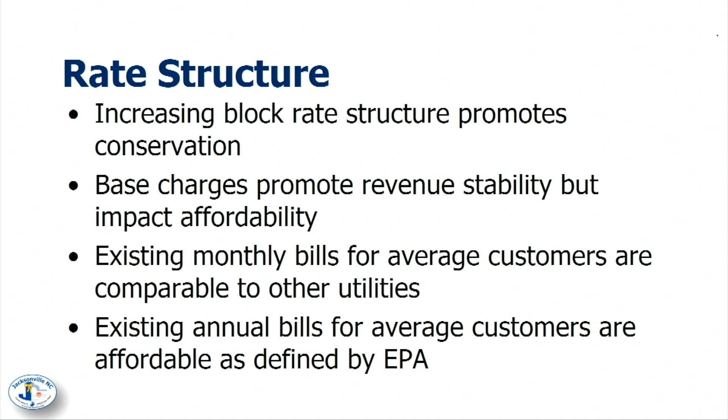And then our existing annual bills for average customers are affordable as defined by the EPA. So the EPA gives us a guideline and says that the annual water bill should be less than 4.5% of the median household income. And for our average bill, based on 2021 salaries, we are about 2%. So we're doing really well there as far as being affordable, according to those guidelines.

And when you talk about the minimum usage, the base, that customer that does use the 2,000 gallons or less, we're at 1% there. So there is a difference between a person using 4,000 or 5,000 gallons versus the person only using 600 gallons.

Yes. Significant. Okay, again, we wanted to make sure that clarified, because obviously you got some folks - that's what led to this question. You've got these folks that use an extreme amount of water, and then you got a regular person that just uses minimal. So explaining what you're doing as far as the cost rates is very important.

Yes, and actually we're gonna get to a slide that goes over the actual fee schedule. Thank you.

So just, again, the rate model and how that works - we put in the operation and maintenance, all of our revenues, our budget, our CIP. It looks at our fund balance that we start with, and then the rate increase, it calculates - we do the just-in-time rate increases where it shows what it would be if you had a rate increase only exactly when you needed it.

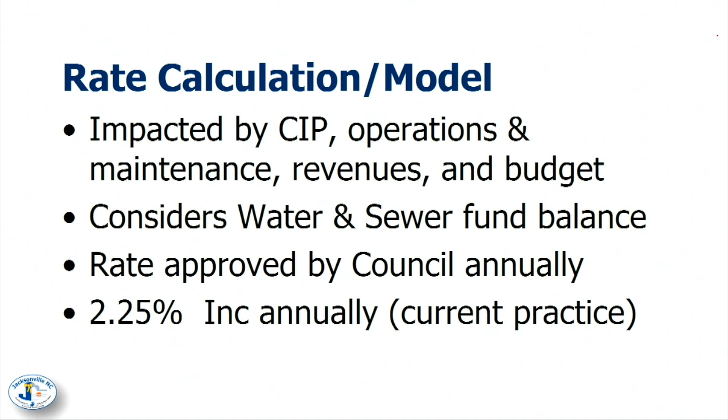And all of that work leads us to our rate schedule, or fee schedule. The very top line, the 5/8 inch meter, is the size that most of our residential properties have. We do have a fair amount of customers with a 3/4 inch meter, so their rate is a little bit higher. But you'll see the fixed rate is the 55.95 total, broken down into water and sewer.

We do have some customers that are only water and some that are only sewer. The first 2,000 gallons of usage is included in that base rate. So 2,000 gallons and less, it's always going to be the 55.95 if you have a 5/8 inch meter.

As you begin to use more, you start to incur additional costs. It's 85 cents per 100 gallons if you stay between 2,000 and 6,000. Most of our residential customers average 6,000, so that's a large percentage of our customers. We also have some customers in the 6,000 to 10,000 gallon range, and that's going to increase your bill a bit more, with a higher rate for that usage. And of course, not many residential customers, but a lot of commercial customers and multi-unit properties get into those higher tiers.

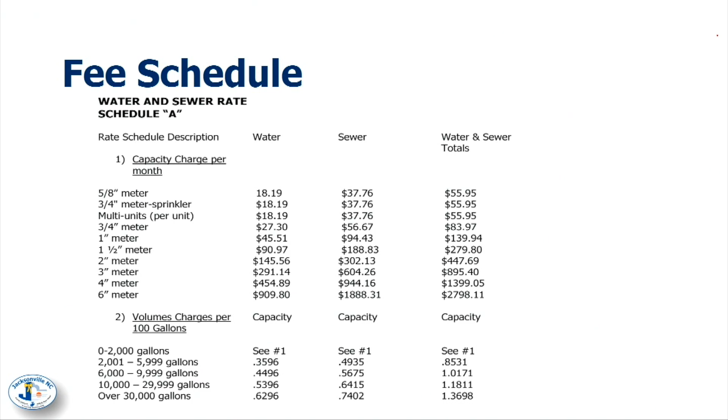So before you leave that, I think everybody's used to buying in bulk, right? If you buy in bulk, you get a cheaper rate. This is the exact opposite of that—the more you use, the more you pay. So when you get into that volume above the 2,000, you actually pay more as you use more.

Question, just out of curiosity, does meter size impact the 2,000 gallons? Is a 6-inch meter still minimum 2,000? It's all the same—the base rate for every meter, no matter the size, is 2,000 gallons. Obviously a 6-inch meter is going to use up that 2,000 gallons a lot faster than a 5/8 meter. But I think we've only got 1 or 2 6-inch meters, like the hospital, so they're never going to be within their 2,000 gallons.

Not to complicate things too much, but when we talk about larger meters, if you have an apartment complex with a larger meter but it's multi-unit, their billing is a little different. They get the 5/8 inch rate per unit. So if you have an apartment complex with, say, a 24-unit building that has a 2-inch meter, they wouldn't be billed at the 2-inch rate—they'd be billed as 24 5/8 inch meters.

So I just wanted to do a comparison between the city rates and ONWASA rates. This comes up quite a bit.

As you can see, the top line is the city's rate. We have the water base and the sewer base there. We include our 2,000 gallons of usage in that $55.95 that you pay each month. ONWASA, their base rate is only $45.36 a month. However, there's no usage at all included in that.

If you were to use 1,000 gallons of usage, the bill goes to $57.32, so it is a little bit higher than our base rate, even with half of the usage. And if you were to increase that to 2,000 to match ours, their bill goes to $65.29. So it's about $10 more for the same amount of usage.

So while we put this up as a comparison, we have to remember that ONWASA has a completely separate system than the city. In many cases this includes water and sewer, so that might be comparable in, say, Richlands or Swansboro, but much of the county doesn't actually have sewer. And some, like the neighborhood that Derek lives in, has private sewer, so they would pay an ONWASA water rate but a private sewer rate. So we put this up as a comparison just so you could see, because they are adjacent to us.

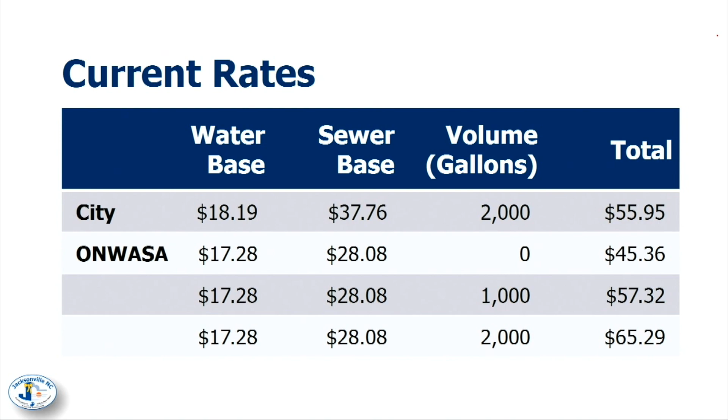And they have a different rate structure than we do. Many municipalities around have actually gone to zero gallons included in your base rate. There's only a few left, and we're one of those that includes any gallons in the base rate. But it's worked well for us. We feel that it helps keep our bill reasonable.

To operate a system, anybody that's run a business knows you have fixed costs whether you have a customer coming in or not. So we have to cover those fixed costs - debt service payments, loan payments that we have to make, breaks and repairs, parts, personnel, and equipment. So we have things that we have to cover no matter the usage. But then we have things like treatment, chemicals, pumping, electricity - the more that we use, the more it costs us. So those are our variable rates.

Also, not to complicate things, but if a resident has a 3/4 inch meter and they would like to go to a 5/8, we will allow them to do that. I think it's a swap-out fee. While we will, based on the American Water Works Association standards, tell somebody what the recommended meter size is based on industry standard, we'll allow them to have a different meter size if they request it. So if somebody has a 3/4 inch meter and wants a cheaper base rate, we'll allow them to swap it out to a 5/8.

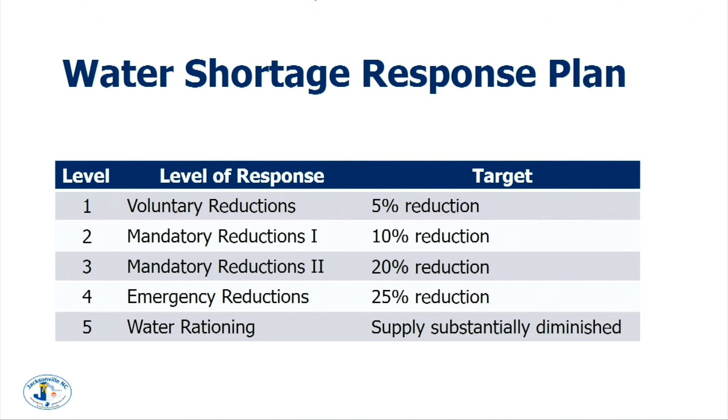Amy, is there anything you want to add to this slide? No, just the note that what it does is put a requirement in place before you can go into this — there's no individual who can just declare the ability to step into this. With each step, something happens and then you have to do this, which helps. The next screen really identifies it better, I think.

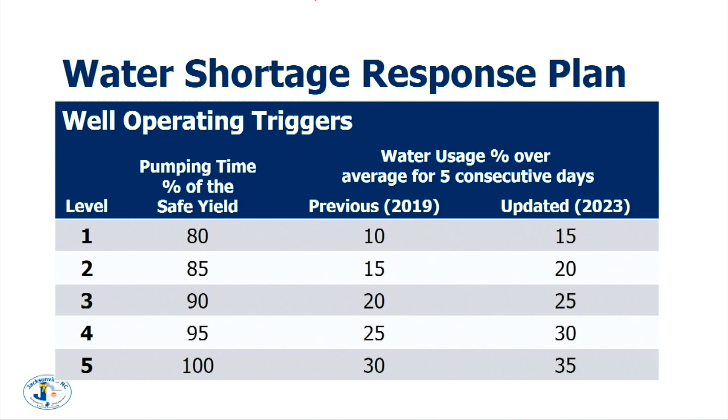While it's not much for level 1 or level 2, Amy, if you'll flip to the next slide - look at the different levels. As you get into the different levels, there's actually violations and monetary penalties associated, and if you get caught doing it more than once, we'll actually cut your service off. This happened in other parts of the country during water restrictions.

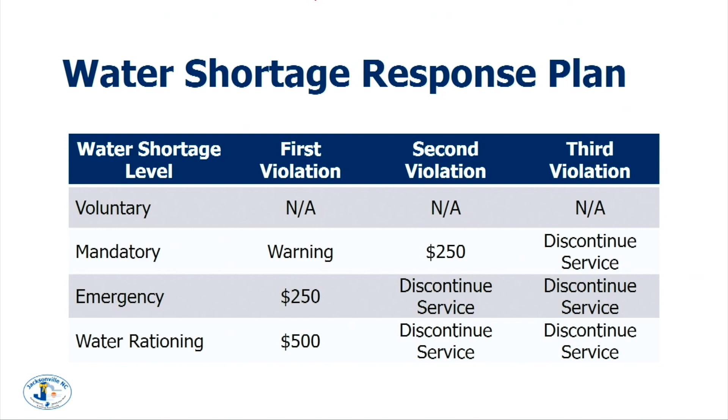I understand what you're saying, where it doesn't really account for population growth or anything like that. I think this is more for an immediate situation, and it doesn't address future planning. It seemed like, how do you anticipate future requirements for water if you're not calculating it here as well - that's where I'm getting confused. Based on what I heard you say, you're not concerned with that because we have the capacity now to support, let's say, future 10 years or whatever, without adding new wells. Yes, that's where I was trying to lead to.

We do have that in place. Every year also with the state, you're required to submit your numbers for the local water supply plan, and that kind of goes hand in hand with this. But with that one, it looks at the next 50 years of population growth and estimates that out. And if in 30 years you're exceeding, say, 60% of what you have, that's when the state's kind of trying to get you to look for more options, look for other things. We're fortunate enough that we do have extra supply, so we don't hit that mark every time. But every year that does get looked at.

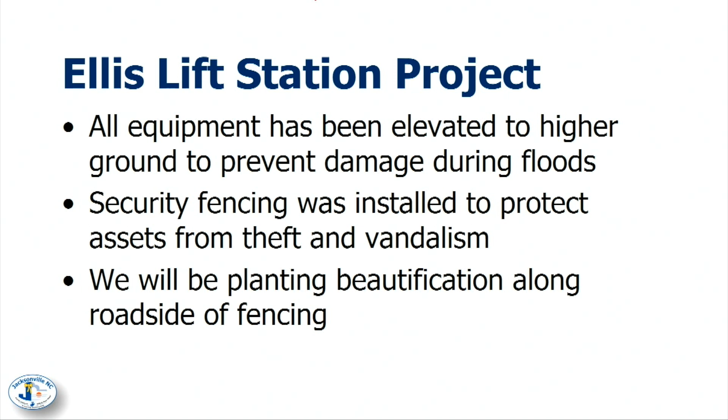There are a lot of little kids in the area who, when they see these big stations, think it looks like a playground. If I were a kid, I would be out there playing too. But they put up some pretty tall fencing over there, and our plan is to put up some beautification along the roadside so that it doesn't look like a fortress or a plant in a residential area. We're trying to bring up the enhancement of the lift station.

So the biofilter has been upsized to 25,600 CFM, which is considerably larger than our last one. The reason we had to upsize is because, like I said, we moved everything to higher ground, and that came with distance. Our last unit was closer to the building in the flood zone, so it didn't need to be as large. We had to compensate for the distance.

That came in at just shy of $85,000 for the biofilter. And for the generator, we upsized to a 200 kW generator, which is oversized for the pumps we currently have in the station. But we went with this size so that in the rare occurrence of needing all 3 pumps at one time, or them coming on across the line instantaneously rather than ramping up, we'd have enough voltage to pull all 3 pumps at once if need be.

That came in at $116,000—a very good investment, because our past units got submerged and damaged. We did everything we could every time it happened, but there was just so much wear and tear from the location it was originally designed for. For the bypass pump, we have a maximum of 8,800 GPM, but we have it set to 4,700 GPM so we don't overcome the force main it pumps to. If we turned it up higher than 4,700 GPM, we'd have problems downstream.

We would have to enlarge our force main as well as the gravity lines that our force mains feed into, so we have the ability of pumping more than 4,700 GPM. Hopefully we'll never have to, but if we do, at that time, or prior to that, we'll probably look into upsizing the force main.

And I think we're already in the process of considering extending the force main now, so that may help with us being able to turn up the bypass pumps if need be. And that came in at $103,000. Compared to our mobile units, it's considerably more costly, but these are stationary, and also at higher elevation, so we don't have to pull a pump to that area when we have a bad storm, or worry about putting them up on trailers to keep them out of the water. They're on permanent fixtures well away from the pump station.

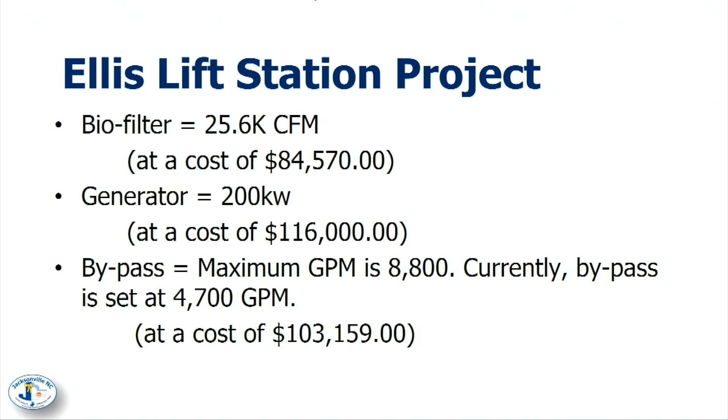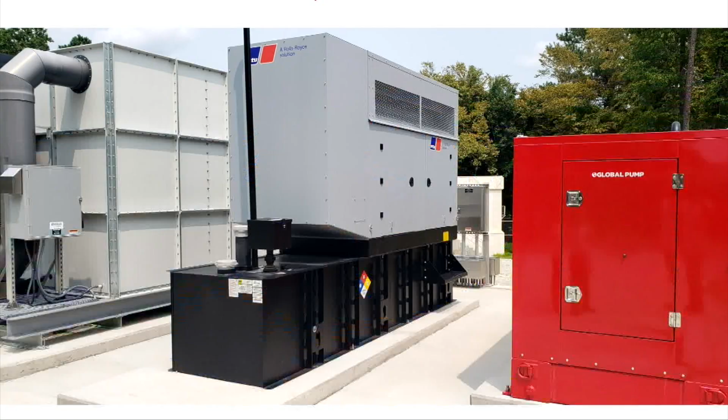How far is it from the station now? Go back, your pictures showed the station in the background. Isn't that the station behind it? Negative. Yes, sir, so you can see the station, the white part. Yeah, so you can see the building in the background there.

I would say with the elevation change, altogether, about 45 to 55 feet as to where we used to have those units right at the building. Because we would even run some of the plumbing for the bypass pumps as well as the conduits for the generators right into the building, right along the side of the building. So we were close. But like I said, this helps being that we're so far, and once we landed where we were gonna put them permanently, that slab is elevated.

So before you leave that, when we started looking at this project originally, I went back and looked at - I know you've seen me show that picture of Ellis pump station flooded up to midway of the door or so. When it flooded like that, I went back to the pictures, the elevation of the land, not including the pad, did not flood at that level. The water was just about level with the top of where the land elevation was at this point. There were trees - I don't know if you remember, but we ended up having to take out, unfortunately, a pretty good row of trees. But that area wasn't flooded during Florence. The water was up to it, but it wasn't completely flooded.

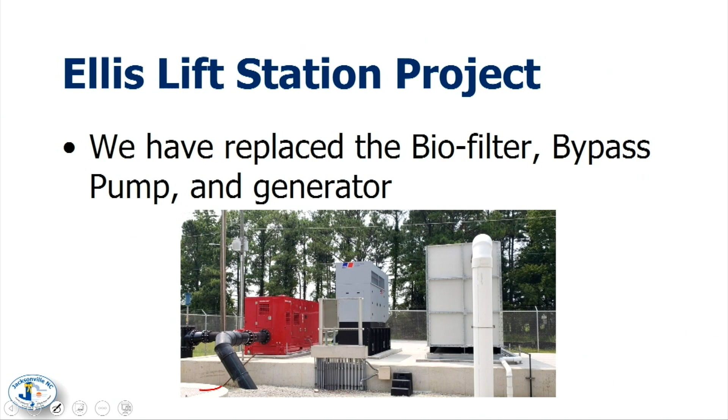I'm not sure if you can see it in this slide, it's at the bottom left corner. That is one of the wet wells that we had to install in conjunction with this project - this right here. So what happens is we've got float bulbs located in that wet well. Once the level gets so high, it'll trigger the bypass pump to run. And it takes about 30 seconds to a minute to prime up.

Now mind you, this is a large pipe as well as it's far, so it only takes about 30 seconds to a minute to prime up. And once it does, it'll hold that level or pump it down until the off bulb falls, and it'll just keep repeating cycles as need be. So where's it pumping to? To the force main - the same place that the station itself would pump it. The only difference is now the bypass pump, which is out away from the station, has taken over, doing the same job that those 3 pumps inside of the station were doing.

Pumping into the same force main that I was telling you about, that we're looking at possibly extending one day. So the philosophy behind this was to make the station more resilient.

When we have a predicted storm or something we'd expect flooding from, we can actually lock the station down. It's waterproof, we waterproof the station, and it can operate. The idea is you want the station operating normally as long as possible.

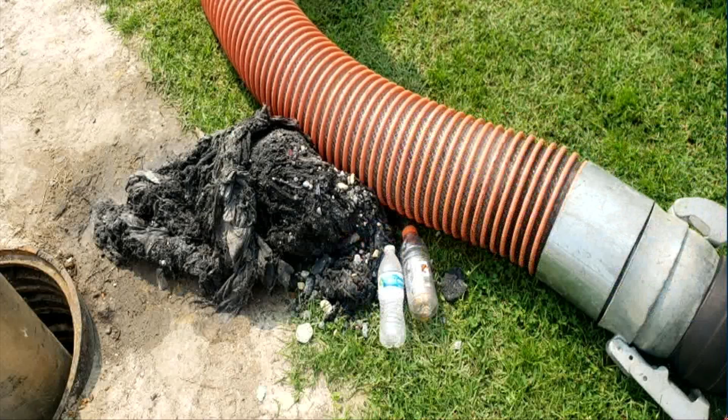Pressure point, yeah exactly. Average flow for this pipe - this actually comes from Ellis Lift Station. Ellis is what feeds this pipe. It averages 900,000 gallons a day.

And that's average, that's not in wet conditions usually. So here I had them place the bottles next to the debris just to show you in reference of size. You know, that's a lot of debris hanging down at any one joint.

Can you vent that? So the gases can escape? Or is that illegal or troublesome? We do have air releases, I know some systems have that.

But you know, in this case, it just boils down to over time - I think this was constructed in the 70s, so you have 70s construction. I think this station was built in 78, maybe. So you have 70s construction, concrete pipe, hydrogen sulfide gas, and there's so much flow through there that it's almost impossible to do anything, which is why you can see the bypass that they've set up, and you really don't want to know what that bypass is costing us.

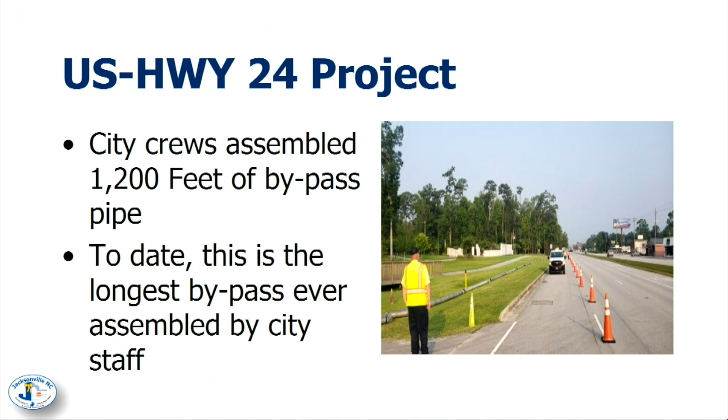So in order to do this, they had to make confined entries, and here you have some staff members making a confined entry to install a pneumatic plug. That's how we bypass the line. So we put the plug in the downstream side. Now that manhole becomes a wet well. So we pump out of that wet well, out of that manhole, 1,200 feet away, and discharge.

And it's temporary, so they turn it off every night, it's not like it just stays on. They only use it when they're working. The longest they left it was 2 or 3 days for the liner to cure. And like he said, those 2 or 3 days we had crews - of course we split the shifts up, but we had crews working continuously around the clock.

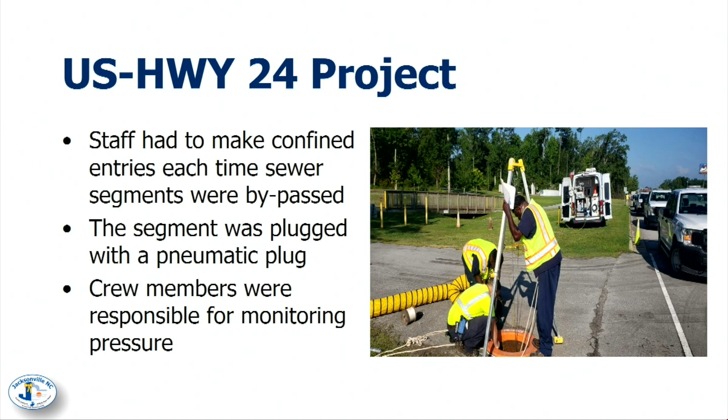They were there to monitor the pressure in the plug, making sure there were no leaks, and making sure the work zone stayed set up, because sometimes people will hit cones, not purposefully, but it happens. So that was their main duty on site: checking the work zone, the pressure in the plugs, and watching for leaks.

All of that led up to this process, which is lining of the pipe. Once we got all the gaskets cut out and debris removed, we had a company come in and line that compromised pipe. The liner is like a fiberglass sock that goes through the line and is pushed in using water pressure. It's filled from the top of that lift with a large hose, forming water pressure that inverts the sock, pressing it against the walls where it adheres and cures.

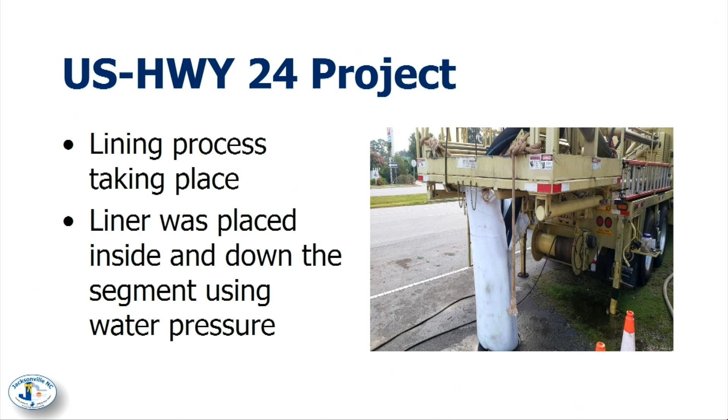So we don't have to worry about this rebar anymore, because there's actually a liner through the whole circumference of that pipe. Our next phase will be to do the same thing to the segments upstream and downstream, as well as visit the possibility we discussed earlier of elongating the force main that dumps into this, and possibly doing away with this whole segment. But we had to do something now to prevent future SSOs, sanitary sewer overflows.

What was the volume of the overflow? It was estimated at 1,700 gallons. Not tremendous, it wasn't bad, but that was the second one. So of course we don't want to keep reporting that we've had a problem in this same area. We are doing all that we can right now to take care of the issue so it doesn't happen anymore.

We've ordered an alarm system for the manhole that overflows due to these issues, the same manhole because of its height. We've purchased an alarm that will call a SCADA phone. The person on duty will get an alarm saying the water level is rising at this manhole. This will give them enough time to get there, check it, and possibly turn the Ellis lift station down so it's not pumping so forcefully through this gravity main. So we're doing what we can to prevent another spill.